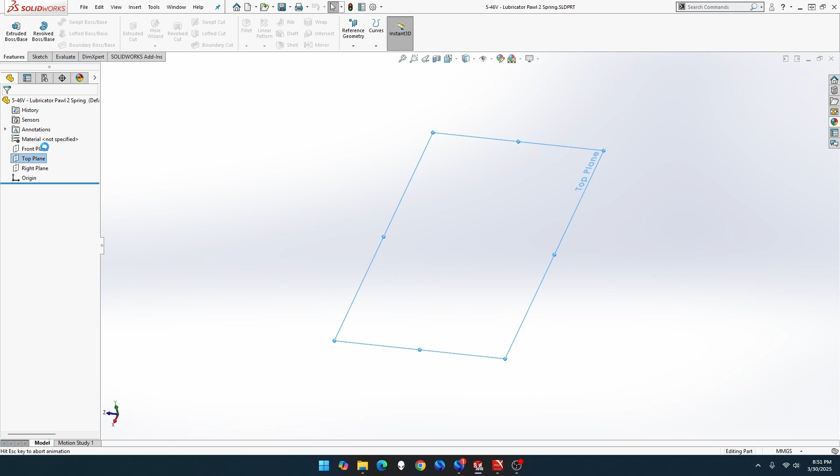So we're going to go top plane, sketch, circle, scoop around. There's going to be, what was it, 3? Yep, 3.

Exit sketch, rotate a little bit so I can just see. It's going to be helix, height and revolution, perfect. Instead of 9, it's going to be 6. Instead of 18, it's going to be 12. And okay, there we go.

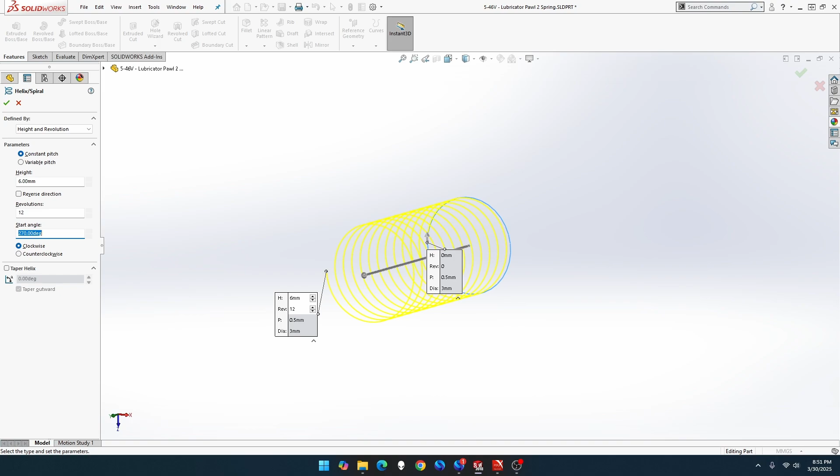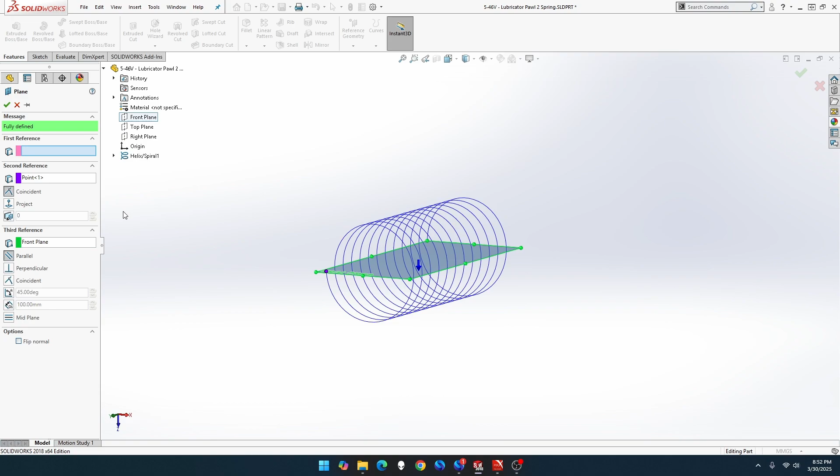Now we want to go reference geometry, plane, point there. We want to go to, where did I get? Front plane, there we go. Oh, what happened? Let me delete you. There we go, for some reason I had the helix selected as well. There we go, and done.

So now let's just go down this one. Sketch, circle, let's click on there. It's going to be dimension, thank you. And that's going to be 0.5 still. Yep, same, it is 0.5. Why does it do that? Why does it put weight there for?

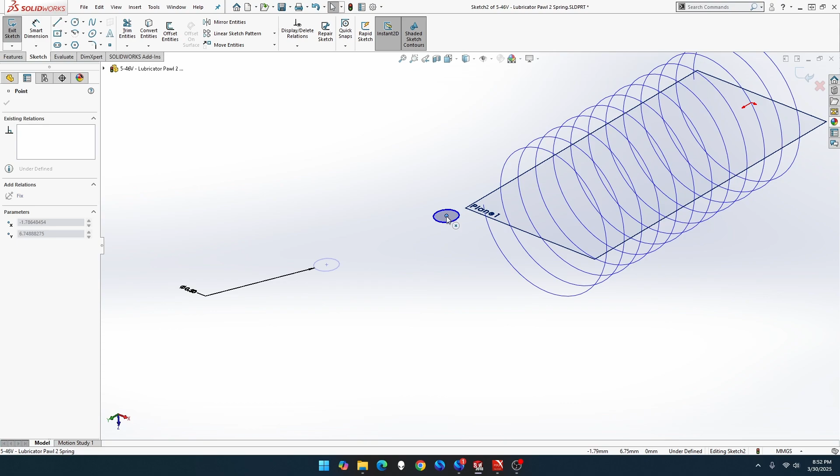Now, is there any way you can lock this in? At the end of the, no. But I just eyeballed it, which is never good in dimensions. There we go, and so that could be exit out.

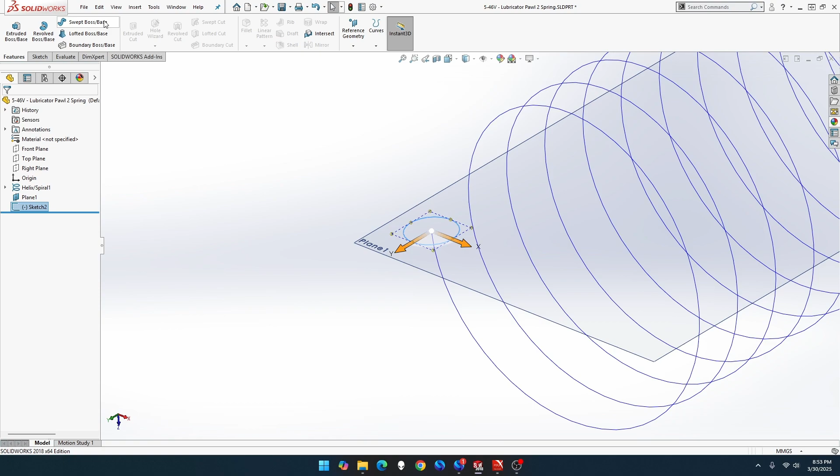We want sweep boss base with the circles already selected, and that one, and done. There we go, beautiful. I think we'll get rid of that plane for now. Yes we can, oh not get rid of it, hide it, sorry. Don't get rid of it, hide it.

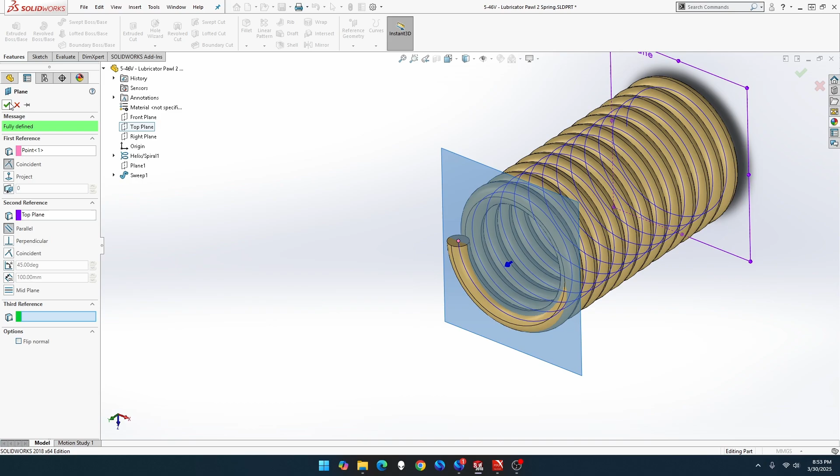Now, essentially the same thing, we want to bring it around. So we want to do a reference geometry, plane, point. That's going to be top plane, and that'll match it on level there. The reason you don't do top plane, you're going to be sketching down here. We want to sketch up here, but on this level.

So let's now do a sketch. Thank you, I didn't do normal to. I just want to get some of this laid in for now. Oh come on, come on, there we go, one there. And one there, there we go. Let's just go out there. That's normal, that one, there we go. Beautiful.

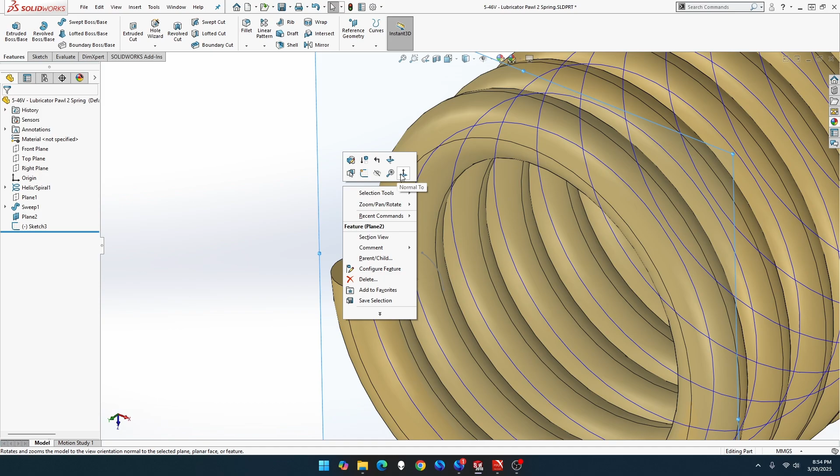And that's going to be, right, dimension. It's going to be 1. Oh hold on, exit sketch. Sorry, redo this one, we don't want to start a new sketch, we want to go back into that sketch.

Okay, this point and this point, let's make it horizontal. As with these 2 points, horizontal, as these 2 points will be joined. There we go, and this curve will be tangent. Okay, this point and this point should be, there we go, perfect I think. Oh hold on, oh yep no, that's good, that's what we want.

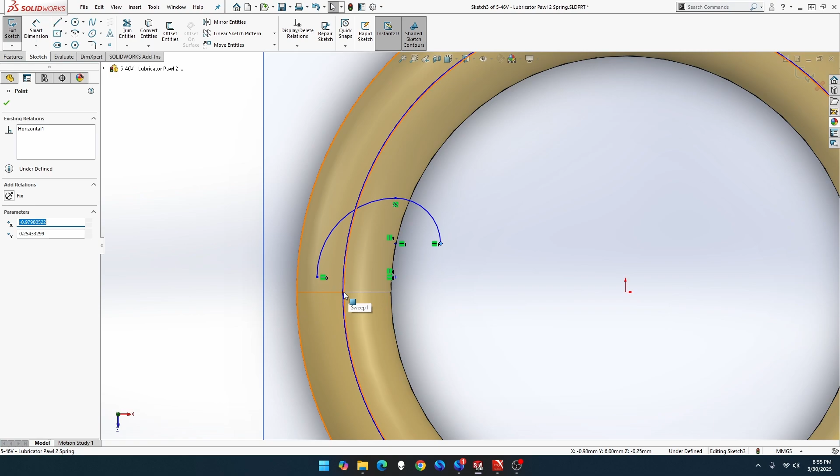But where are we? Can't find it, there it is. That point and that point is going to be, oh man, okay. Let's just do a dimension on this one's going to be one, there it is. That point and this center point, go on dimension, sorry.

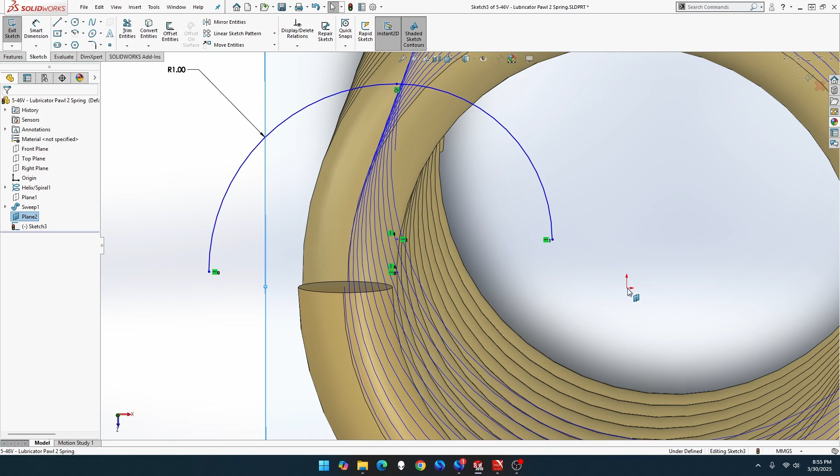That's going to be 0.5, if I remember correctly. It is. And this point and this point will be, there we go, it is now locked in. Beautiful, so 1.5 and all the parameters there.

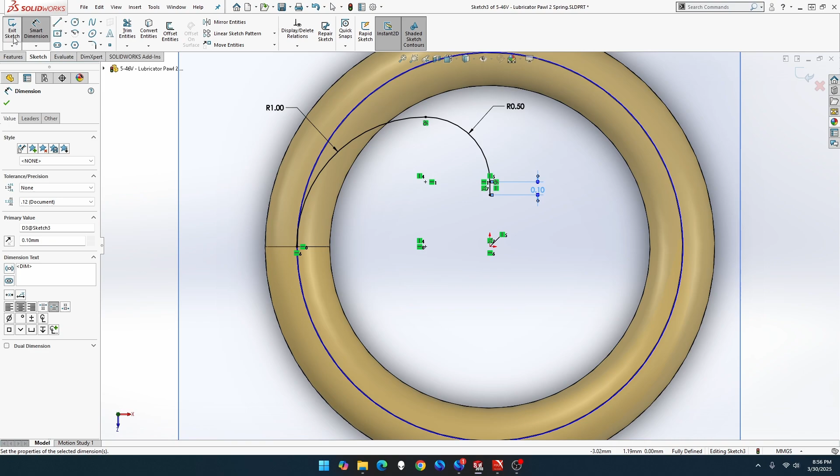Beautiful, let's add down there. That's going to be 0.1, and exit out. Now we want to go sideways, so we want the side view.

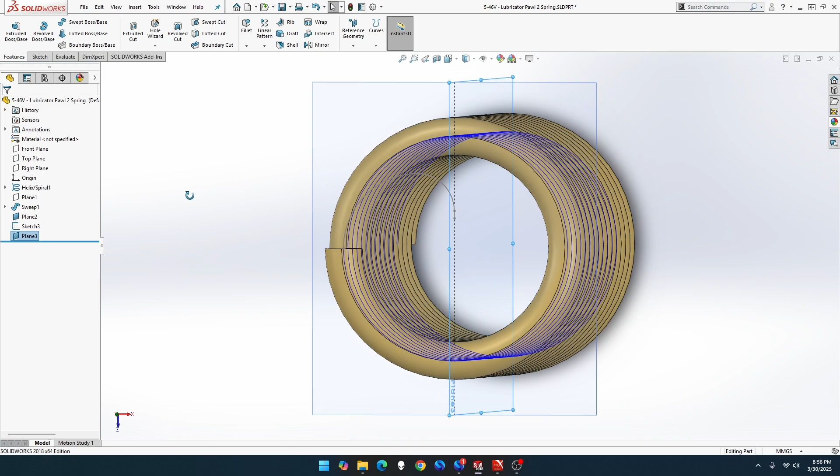Let's go to reference geometry plane. We want that point there, but we want right plane, there we go. And okay, we hide that plane, we don't need that anymore. We do want this one.

Let me just curve that around a bit. Yep, so we want this one curved around there now. Let me put a sketch, I won't normalize it just yet.

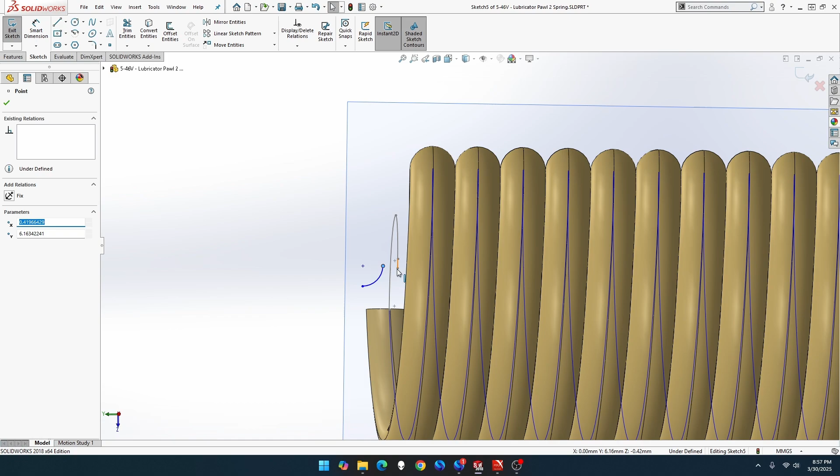We want from there. Let me just put in there, there we go. So that point and that point and that point, thank you, will be joined. That line and this line will be tangent.

Let's go to that sketch, let's normalize it now. Go back into that sketch. That's going to be a dimension of, what was it, 0.22, there we go.

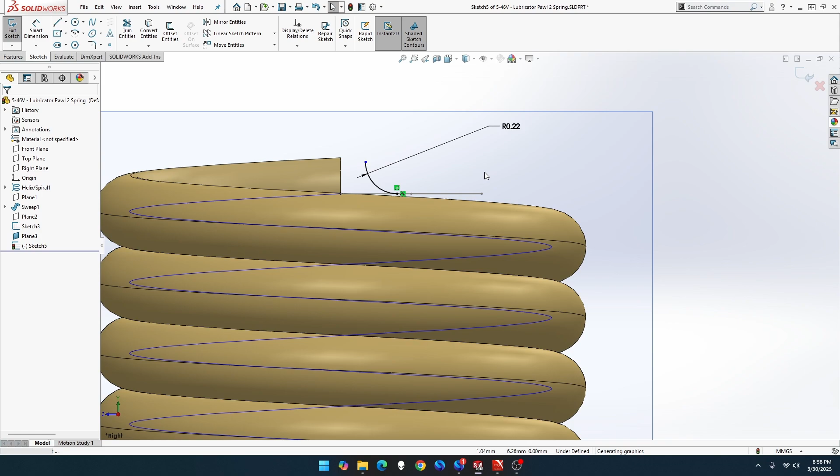Actually, hold on, no, actually get rid of that dimension. It's going to be, sorry, it's going to be lined up with this one in. My apologies, that's going to be make vertical.

Then we're going to have a line from there up. That's going to be, actually hold on, that can be, actually we're going to do the hook one, but then make that tangent first. There we go. And that locks in, beautiful.

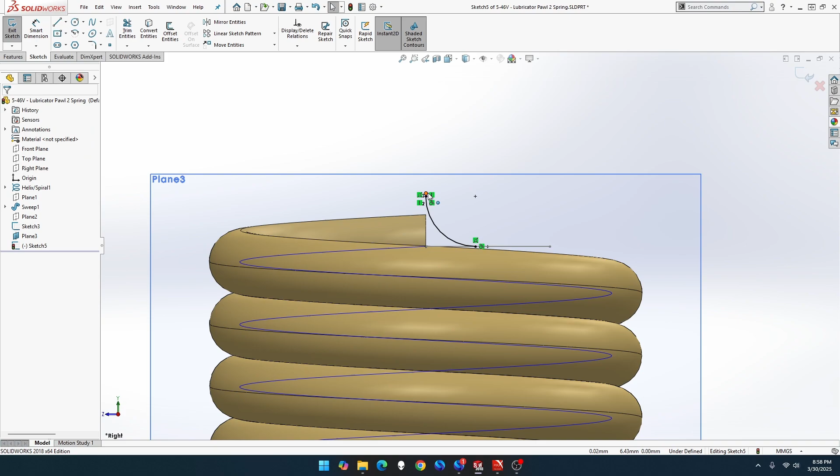Okay. Let me actually go smart, sorry, line. We're going to go up, touch that point, curve, out, touch that point, curve, and that's it. Okay, let's just bring that one up, there we go. So these 2 points will be joined.

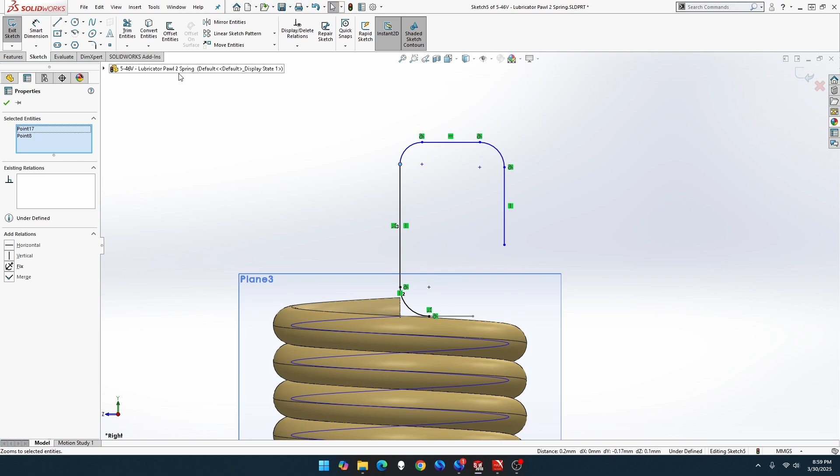Perfect. Now that was, what was it, 4.8 from that point to that point. 4 point, I hit the wrong number, 4.8. Whoa.

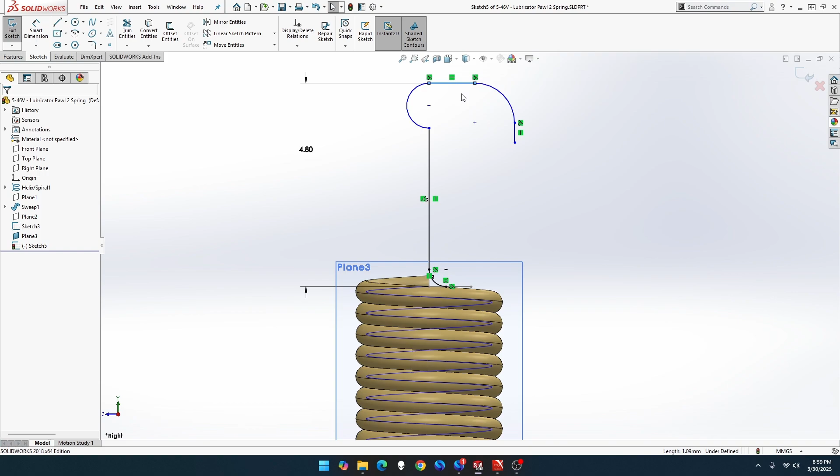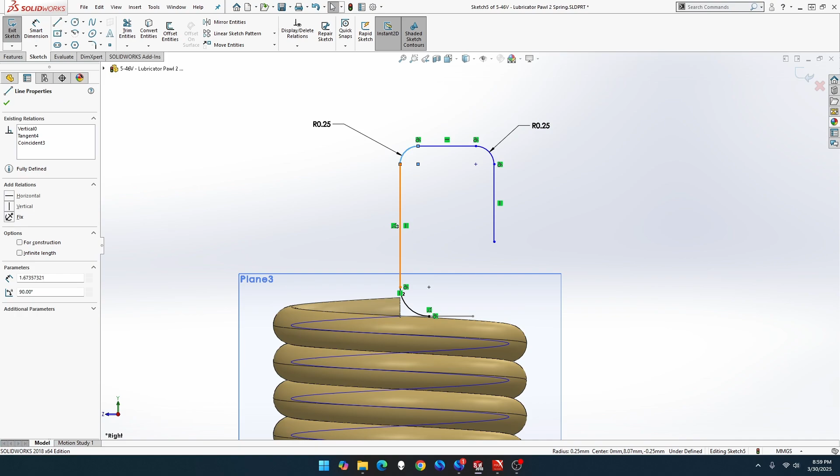Hold on, something's gone wrong there. Let me just cancel that. There we go, yeah, that one. Dimension, that was 0.25, wasn't it? That point and this, those two lines, make tangent. That way locks it in. Okay, so that should be good.

Now let's try this again. 4.8. There you go, that's better.

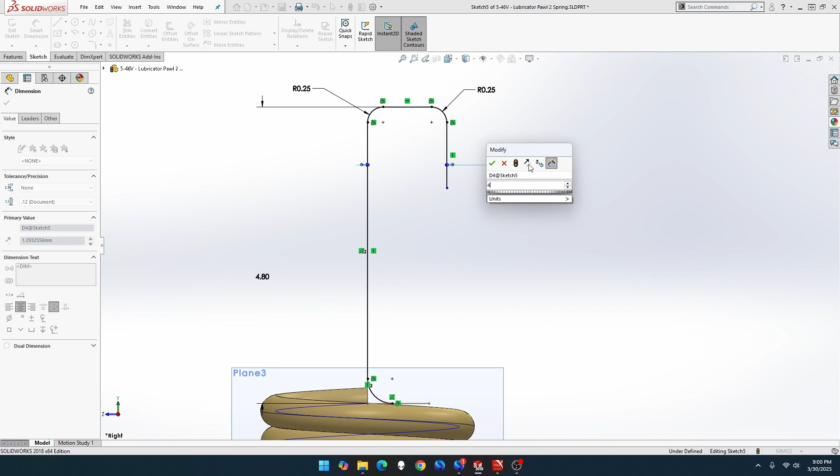From there to there will be, what was it, 4.5. And that should be, yeah, that's still got to be adjusted. That point to that, on that point to that point will be, let me just put there, it's going to be 2.4. There we go. And that one go, there we go. And that one go there, just out of the way. That one there, just out of the way. There we go, and that should be locked in.

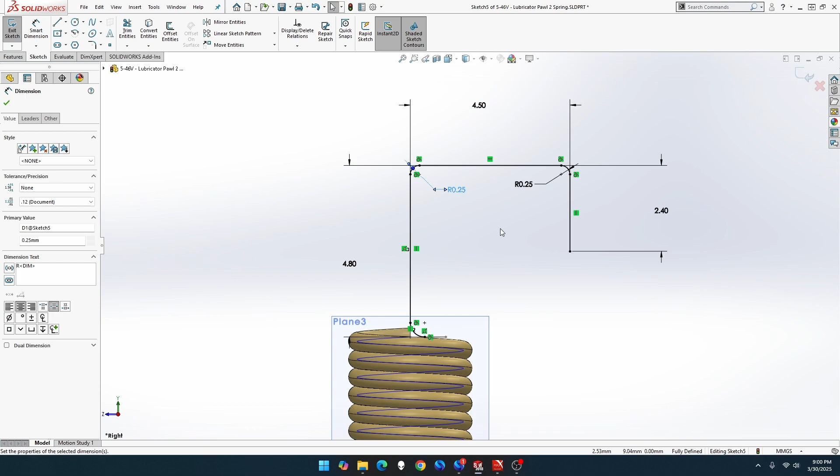Beautiful, so now exit out of that one. Let me hide you. So that's that end done. It's beautiful. Let's now go to...

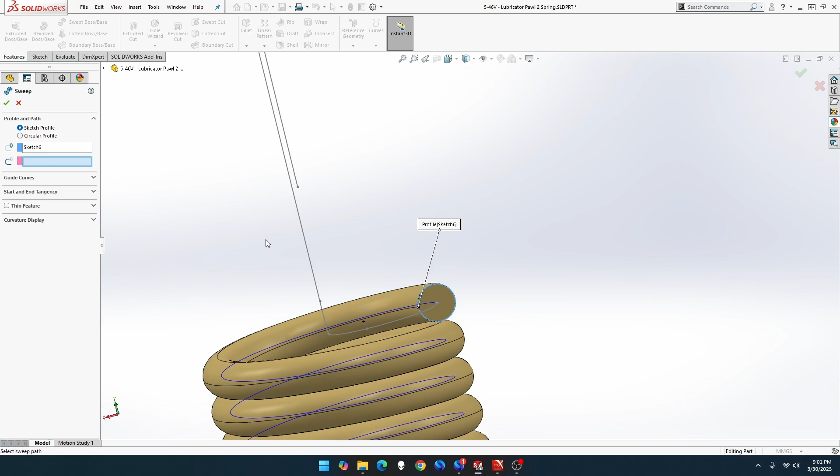Sketch, circle, lock it in, exit, sweep boss base, and we want that one there, and okay, beautiful.

This one here, that surface there, it's going to be sketch. Make sure it's in the center. There we go, beautiful. Exit out. Sweep boss base, we're going to do that one.

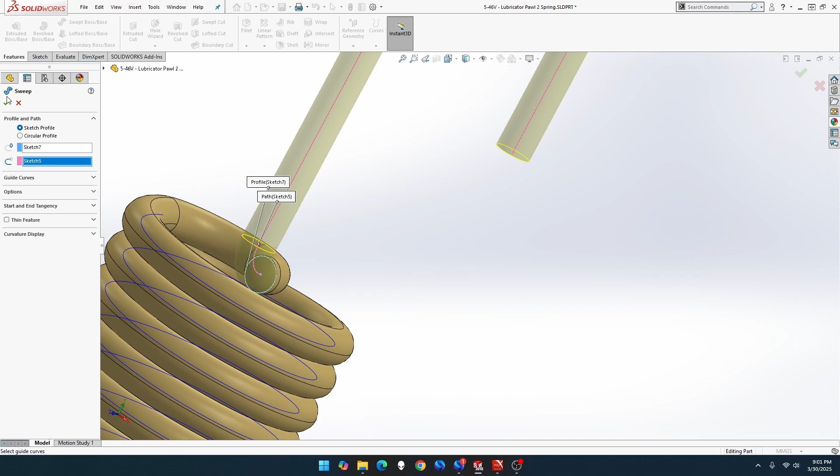That should be everything there. Okay, that's that end done. Beautiful. Now we need to do the other end. That's the easy end. Well, yeah, it's not that bad, it's just a curly part.

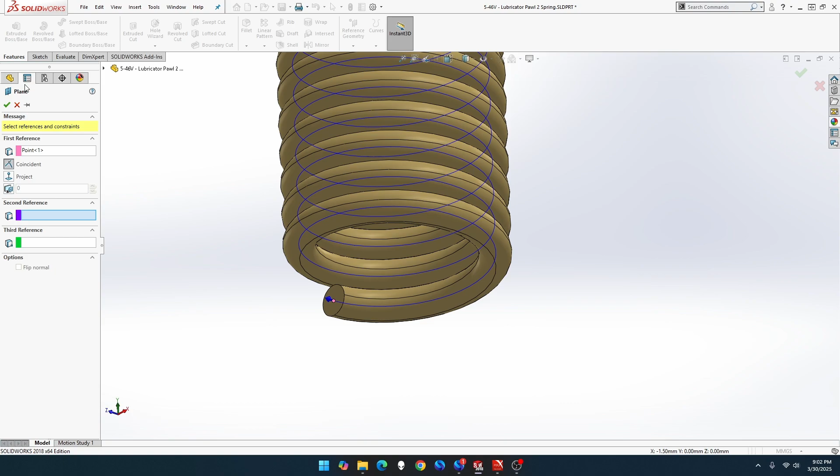The circle at the end there. So now we want that one. Yep. So we want, what am I doing? Oh, plane. So it's going to be end of that one, and it's going to be, which one was it again? Top plane. Yes, okay.

So now let's go to sketch, circle. We want to go one there, one there. There we go. So can I join these two together? Oh, point, yeah, there, thank you.

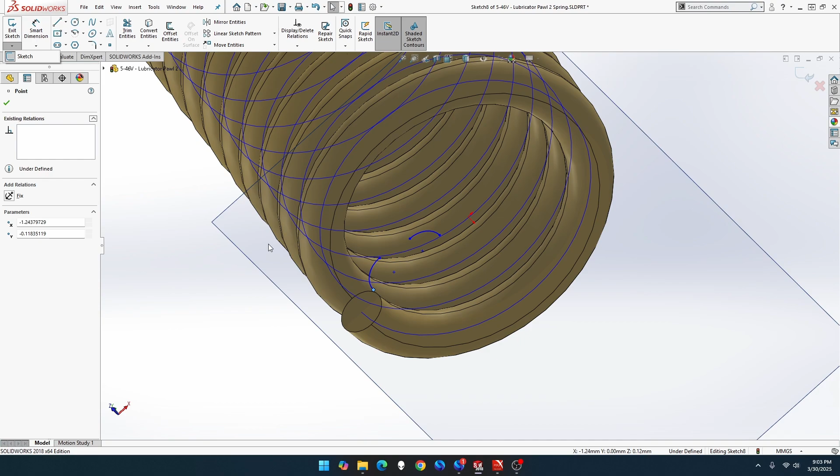No. Bugger, okay, how do we do that again? Oh yeah, you go out of that. Sorry, exit out of sketch. You can't normalize once you're in the sketch. Don't think so, I don't see any way of doing that. Okay, let's see, normal, nope. Wrong side, normal, thank you.

Now let's edit a sketch again. We put those two together. These two curves are going to be tangent. That's going to be 1, and that's going to be...

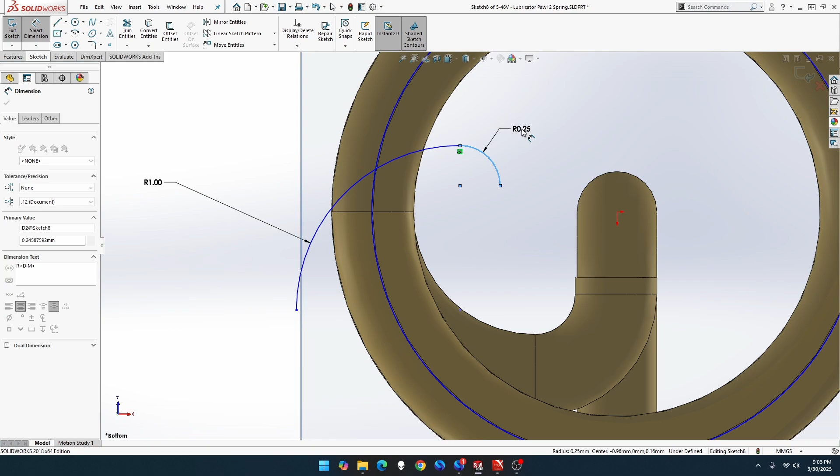Click with help, 0.25. Yeah, that point and that point is going to be vertical. This point and this point will be horizontal. Which one's that one? Okay, so...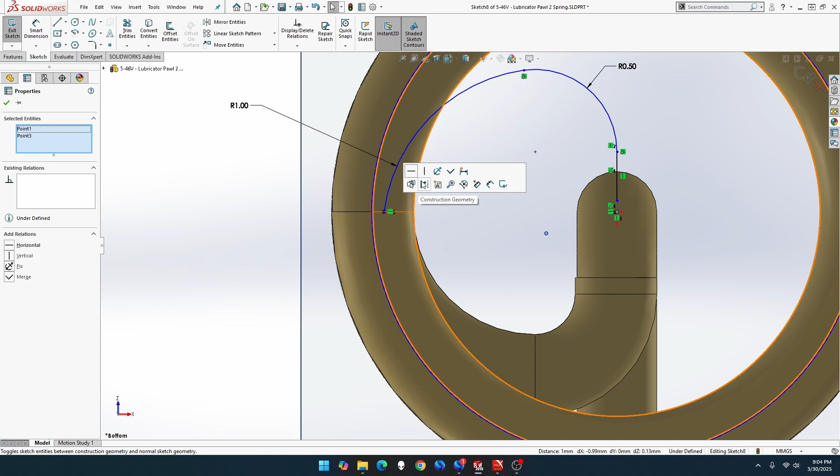Let me just do something first. Let me go line down. Now that line and the curve is going to be tangent. This point and this point will be horizontal. Why is that not... oh, hold on, I see what I missed. This point and this point will be vertical. There we go, and that lines up perfectly there.

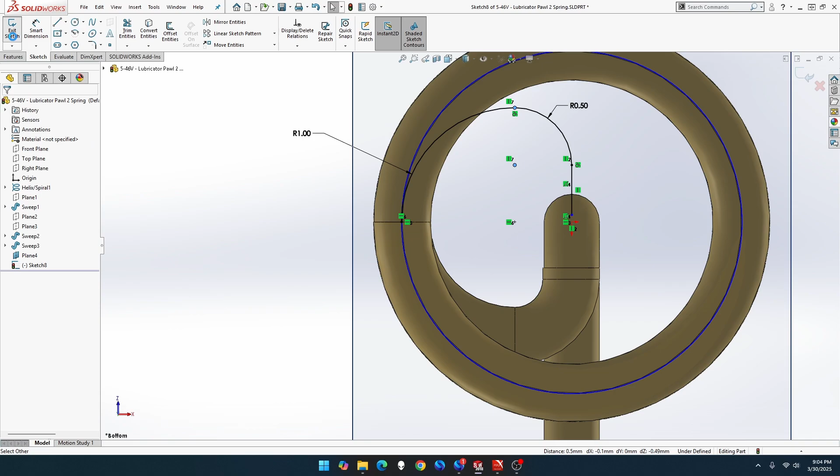There you go, excellent, so exit out of that sketch. There we go, so we got that one. Let me hide that helix, by the way, thank you. Just less clutter on the screen.

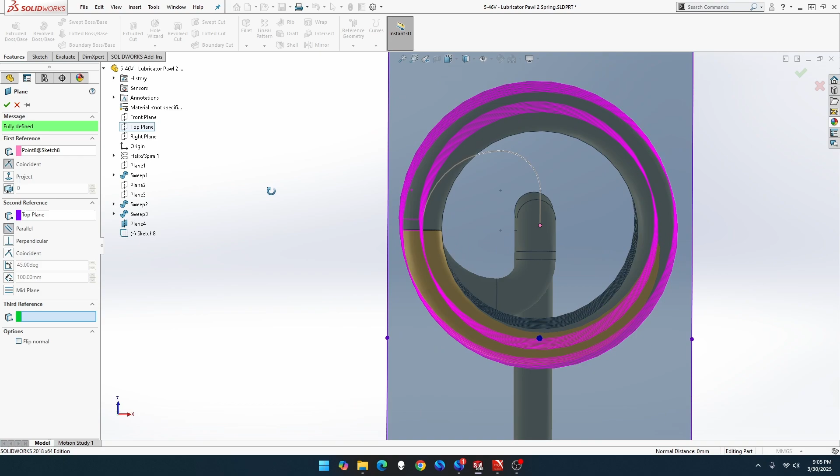So let's go plane again. We want this point, but we want the, which one is it? No, not top. Top, I mean. No, it's not top, sorry, not top, not top, not top. Clear you. Right plane. Yes, right plane. And done. Clear you, hide you.

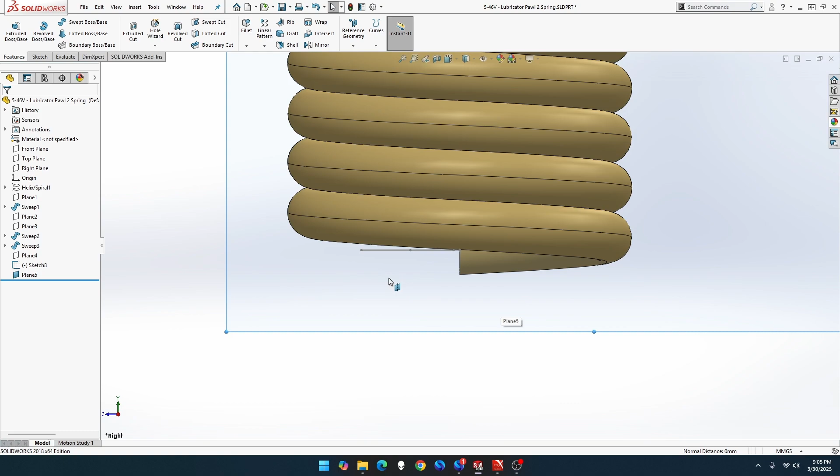Now let me go to normal. Oh hold on, we got the right one? Oh yeah, yeah, because we won't... oh, that one there, so we'll curve that one.

Oh hold on, let me edit you, because something's... because this point... oh yeah, I know what I did wrong. Oh well, I forget, sorry. That one there is going to be 0.1. There we go, that's what I've got to do.

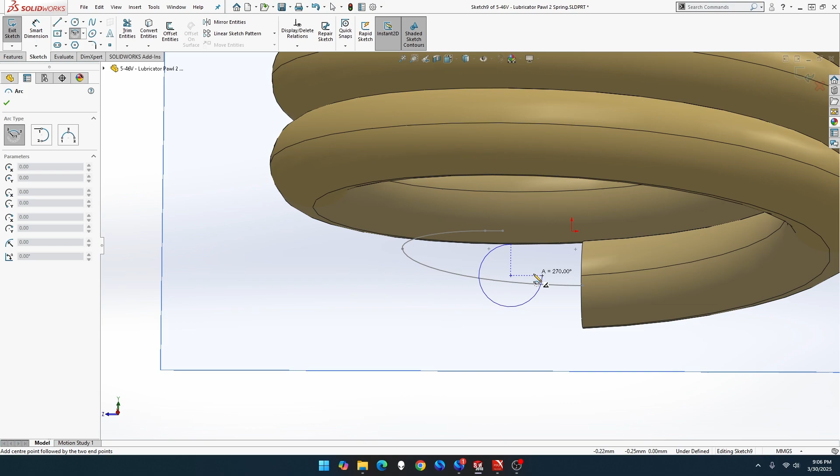Exit out, so now it's too close to it. I've got to put a dimension on that one. So plane, let me sketch. Nope, actually, yeah, let me do a curve. It's going to be from there. Oop, nope, oh wait, there we go. So that point and that point will be joined. There we go, exit out.

Let me now go normal, sketch. So now this point and this point will be... oh hold on, exit out sketch, I did it again, don't create a new sketch, go into the old sketch. That's what I keep doing wrong. Those two are going to be vertical.

Now this line curve and this straight will be tangent. We want a line down there. And that line and this one will be... oh, what happened? There you go, I think I clicked the wrong thing. There you go. And that is now locked in.

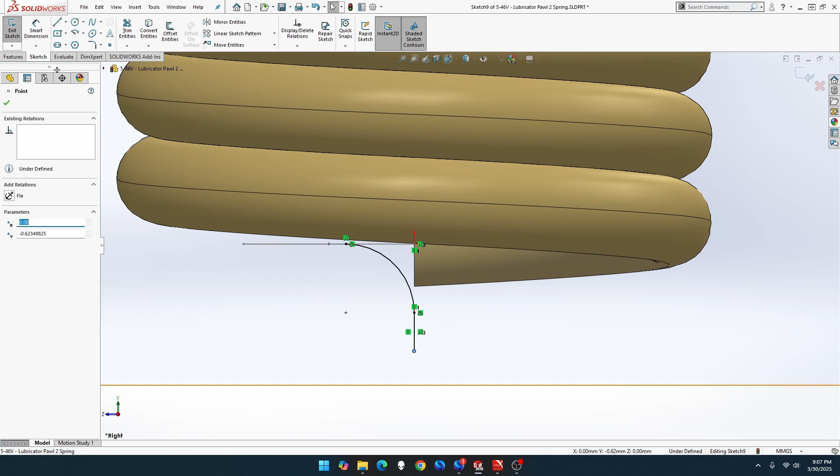Now we want... let's make that 0.1, just 0.1 for now. Exit out of that one. Now, because that's there, we're going to need... oops, let me just hide you. Oh, exit sketch, thank you.

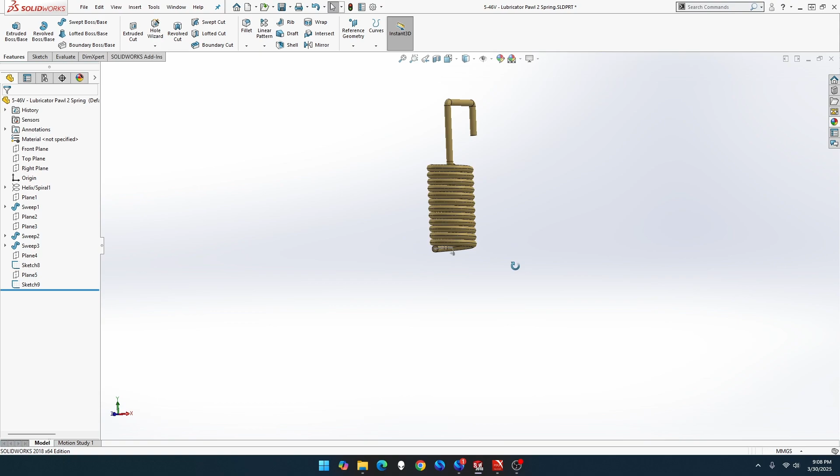Hide you. Now this one's got to be this plane. So if we click that one there, that's the end point. Plane, we want to go to, which one was it? Front, I believe. Okay, so if I do normal, yes. This one's going to curve around, it's got to be opposite that one. Perfect.

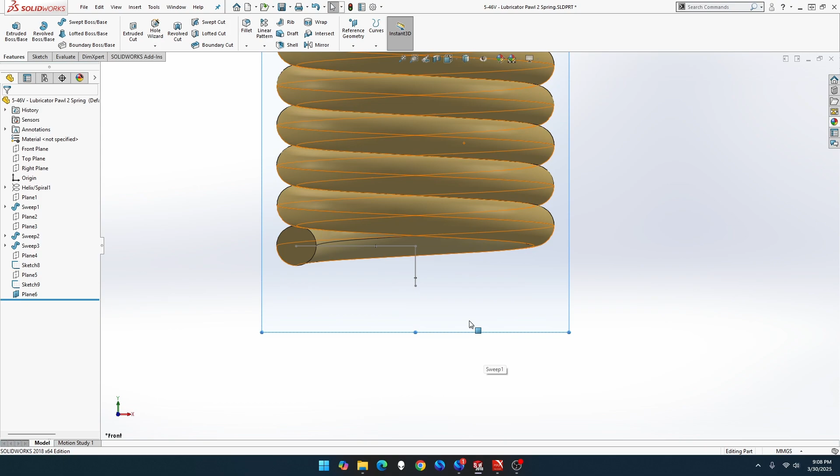So now if we go to sketch, line down, touch that point and curve, touch that point and curve around to about there. Beautiful.

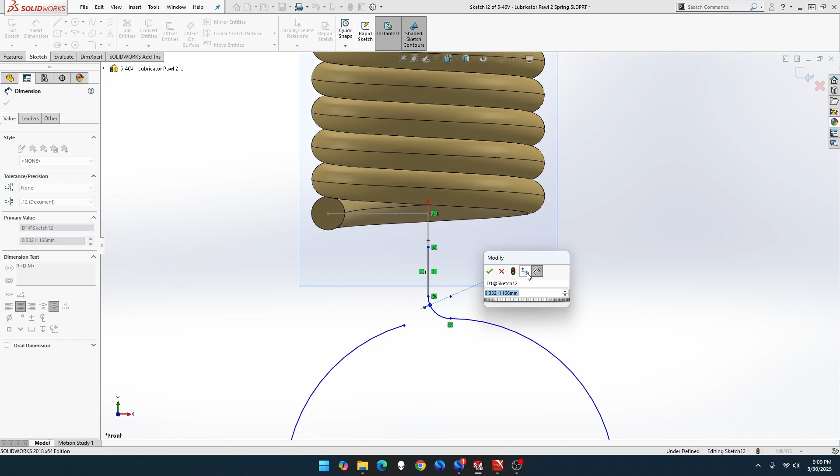That should be, what was that one again? 0.1? No, I think it's 0.25. There we go. Now that is going to be, this is going to be 2, beautiful. From there to there is going to be 0.5, I believe it was.

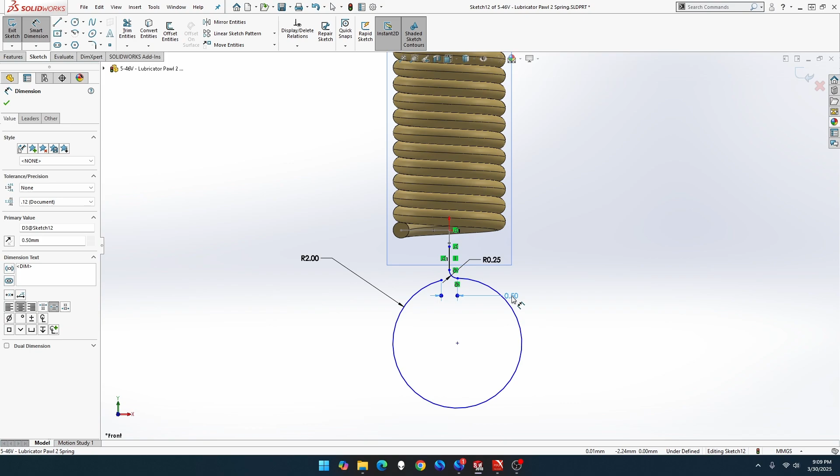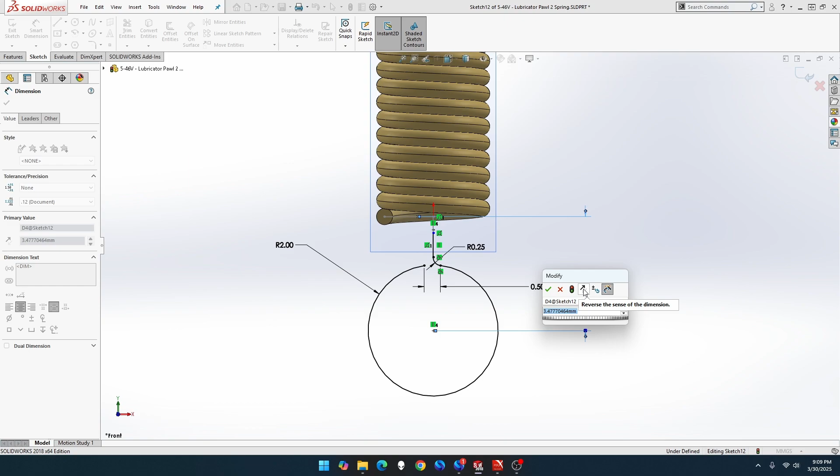Sketch this point, and this point is going to be vertical. And this dimension, where are we? It's going to be 0.35. So from there to there, going to be 3.5, and that locks everything in place. Exit out sketch, that looks good.

Hide that plane. Let's go to this face here, not normal. Create sketch, you want a circle, center there to there. Perfect, exit out.

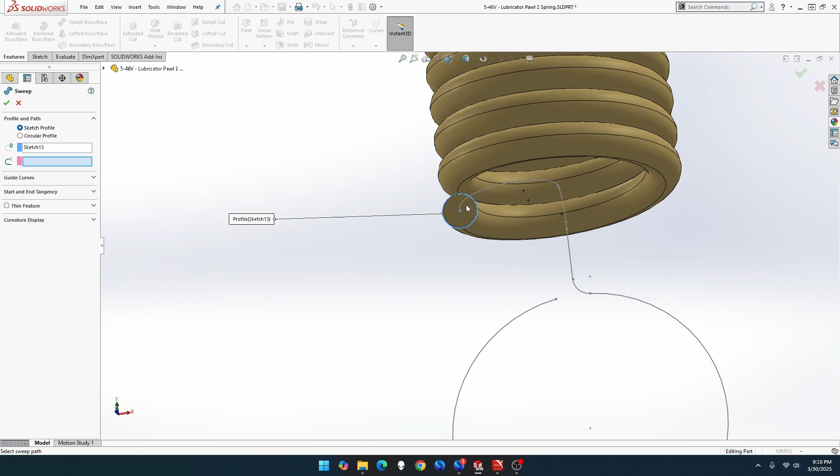The boss base one, click on that one. Ooh, it worked this time, that's good.

Now again, we want this face, sketch, circle. There we go. Now you don't have to exit, you always go there, then click on that one to exit automatically, but the downside is it didn't select it. And that's going to be that one.

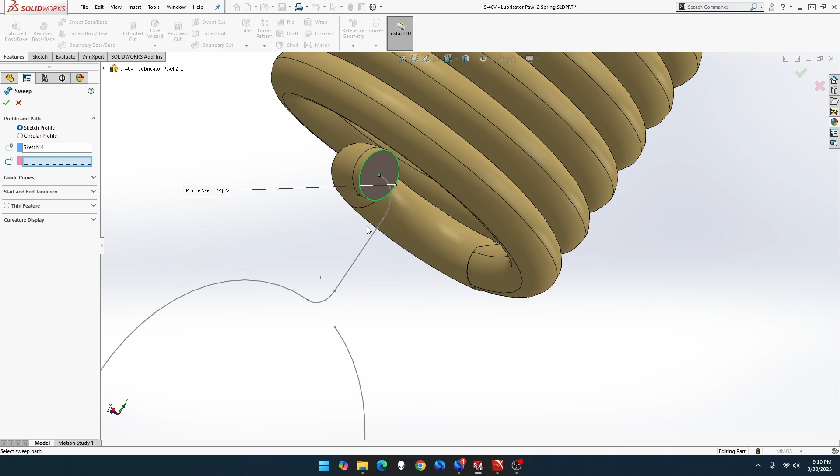There we go. So now we click on this one, sketch, circle, center, out to there. Now I'm not dimensioning it because it locks in the circle already, if you wonder why I'm not dimensioning them, because it clicks on there and locks in automatically.

So exit out, sketch, sweep boss base is already selected there, so it saves one this hassle. And that one there, ooh. Sweep operation failed to complete.

What did I miss on that one? Okay, let me go out of that one. Oh, something's not locked, that one and that one. Nope. Why is that not locked this time? Okay, I think that just locked in.

Let's see, so let's go to set sketch. Yep, pick that one. No, it did not. Okay, what did I do wrong? There, that one.

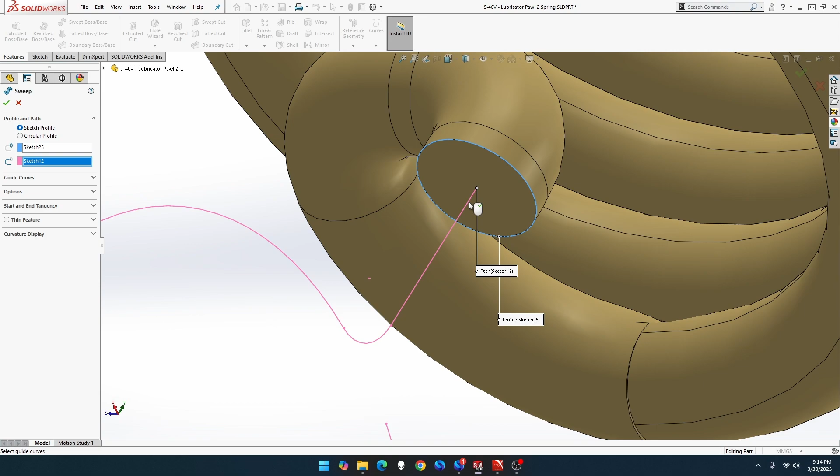Let's try another way, let's just undo until it disappears. There we go. So if I... Oh. Interesting, you can't see it. Hold on.

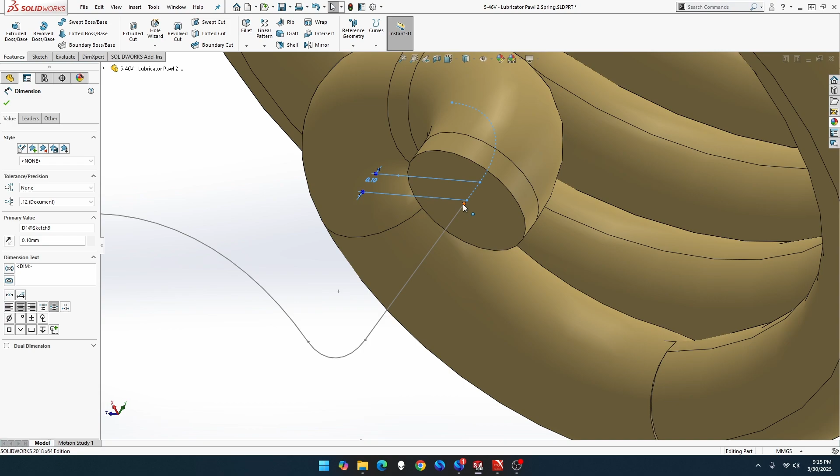If I click on you, no, that's not going to do anything. Interesting. I wonder why it's doing that. Okay, let's try a different way.

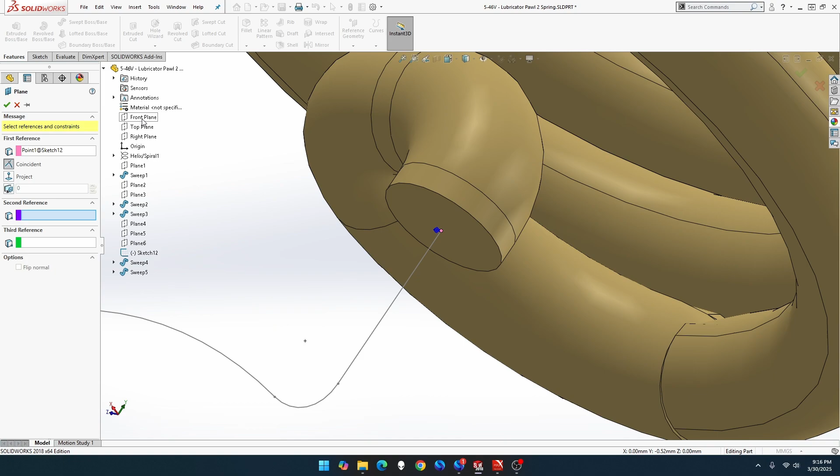Let's go to reference geometry plane, I'm going to click on this point. Now I'm going to click on, let me zoom out so I can see. We're front, nope, top plane. Yep.

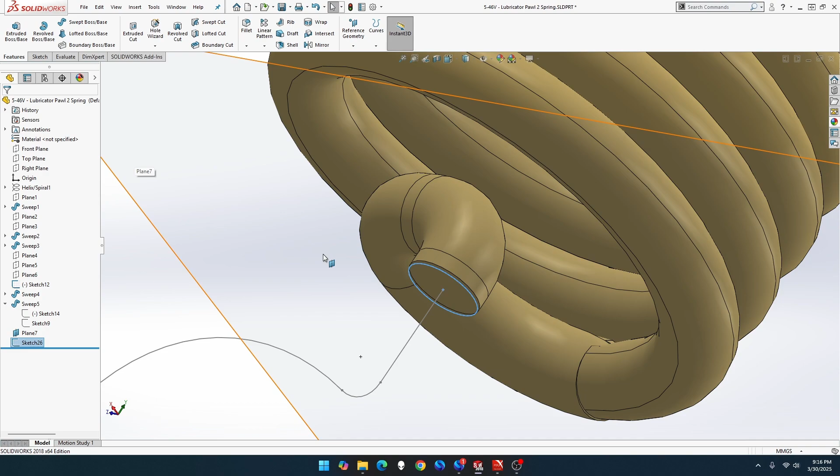Now if I do a sketch, circle, that was what, 0.5. Exit sketch. There, now go to sweep, click on that one, and done. There is a gap there, I realize that, but that's fine.

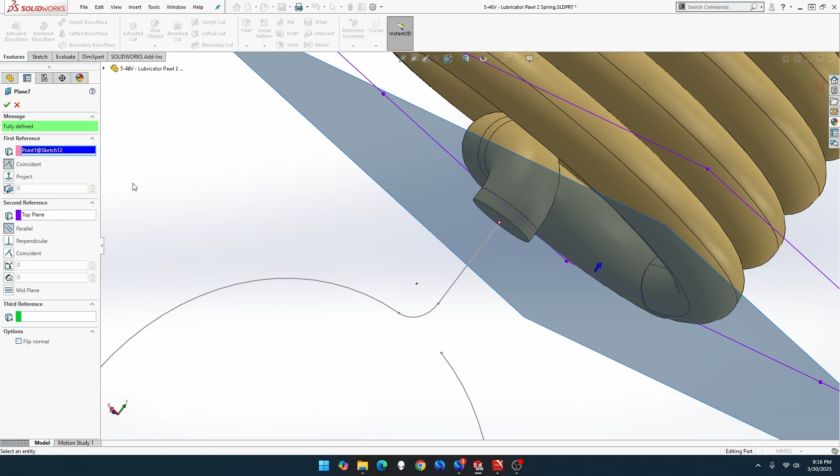Let me get out of that one. So if I do this one, let me edit you. So instead of top plane, if I delete you, but do you, actually probably still the same. This. So I...

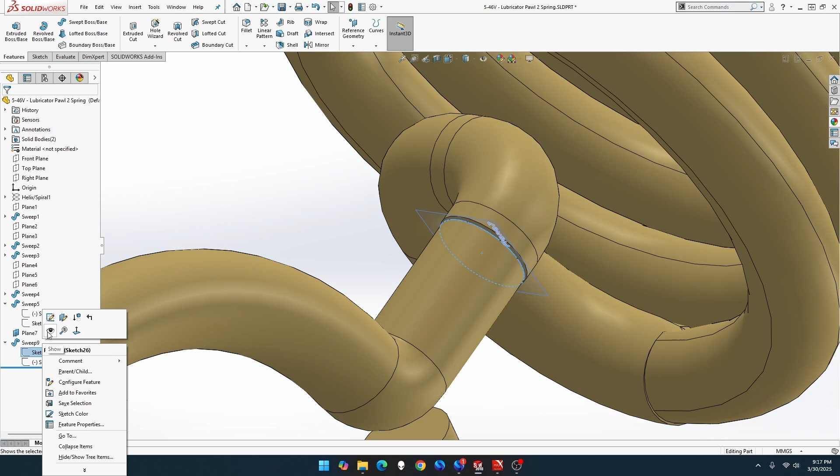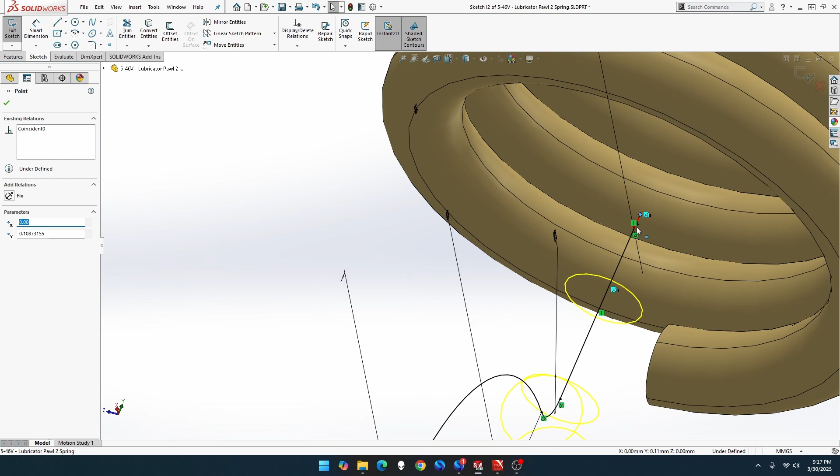Edit at that sketch, if I pull you down a bit, oh no, not that far. Dang. Whoa, what the heck? Why does it do that? So weird. So weird the way it moves. No, it's not moving, what the heck?

Let's get out of that sketch, see what it looks like. Yeah, it's gone too far. So if I go back in that sketch, was that the one? Nope, that wasn't the one, that's one. If I grab you and just... what the heck?

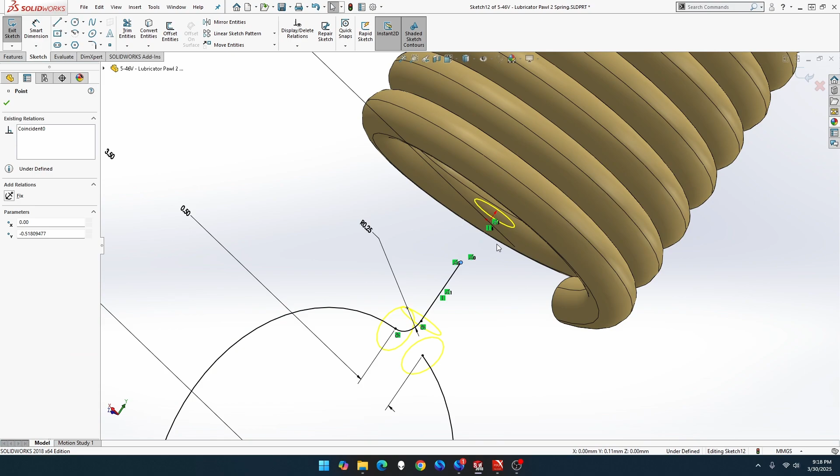Undo, there we go. We go back to that sketch. Let's just put it there. There we go, hide that one. There we go, it's joined up.

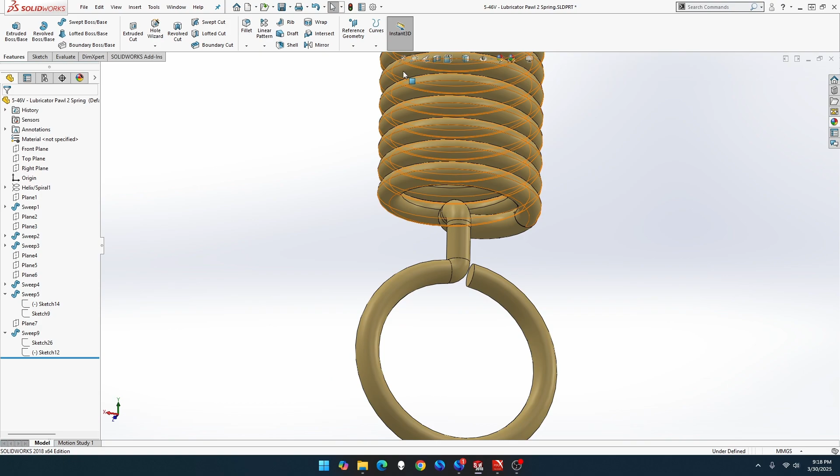Yeah, it's not ideal way to do it, but kind of worked this time. But the idea is towards the end there, when you put in the drawing, it's going to look fine. So probably not ideal to do it that way, but that's why we did it this time.

Oh, where my cursor go? There it is. There's, let me zoom a bit more. Nope, a little bit more. There we go.

That's part 5-46V Lubricator Pawl 2 spring done for the Clayton Undertype Steam Wagon. This is the last part for section 5. So next section will be 6-01A right hand crankshaft shaft.